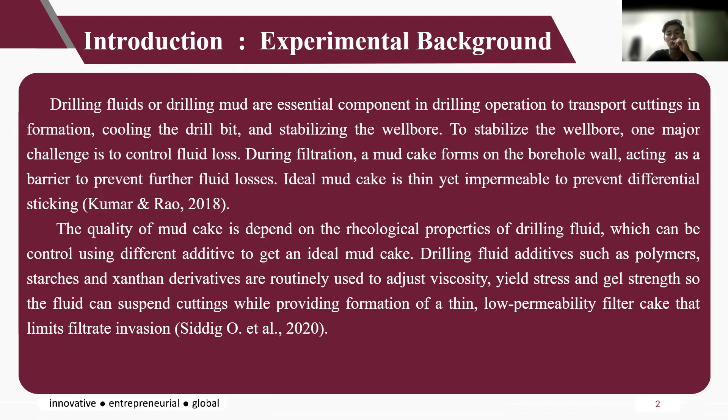Drilling fluid additives such as polymers, starches, and xanthan derivatives are routinely used to adjust viscosity, yield stress, and gel strength so that the fluid can suspend cuttings while providing formation of a thin, low permeability filter cake that limits filtrate invasion.

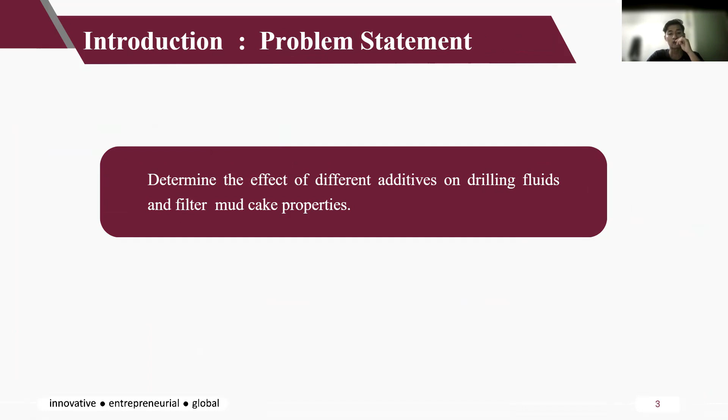Also, the problem statement of our experiment is to determine the effect of different additives on drilling fluids and filter mud cake properties. I will pass the next slide to my friend Isdiat.

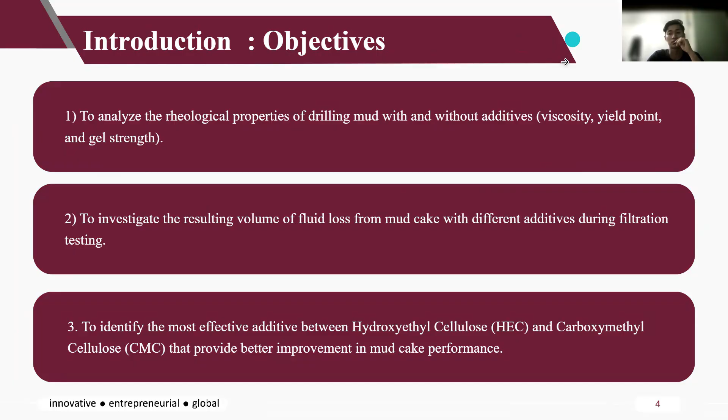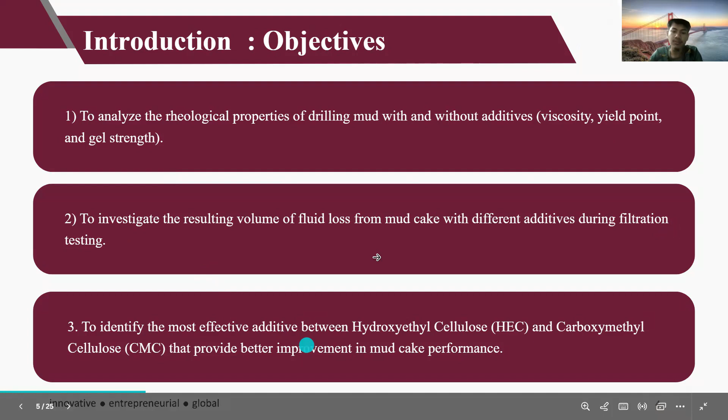Next, I will continue with the objectives. First, we want to analyze the rheological properties of drilling mud with and without additive, which is viscosity, yield point, and gel strength. Second is to investigate the resulting volume of fluid loss from mud cake with different additives during filtration testing. Lastly, to identify the most effective additive between hydroxyethyl cellulose and carboxymethyl cellulose that provides better improvement in mud cake performance.

Next, hypothesis. For the first hypothesis, the drilling fluid with additive will have better rheology properties such as higher viscosity and gel strength than drilling fluids without additive.

Second, mud cake thickness from drilling fluid with additive is thinner than without additive. Third, mud cake from drilling fluid with additive will have lesser volume filtrate than drilling fluid without additive. Lastly, CMC mud cake will have better mud cake performance than HEC, hydroxyethyl cellulose.

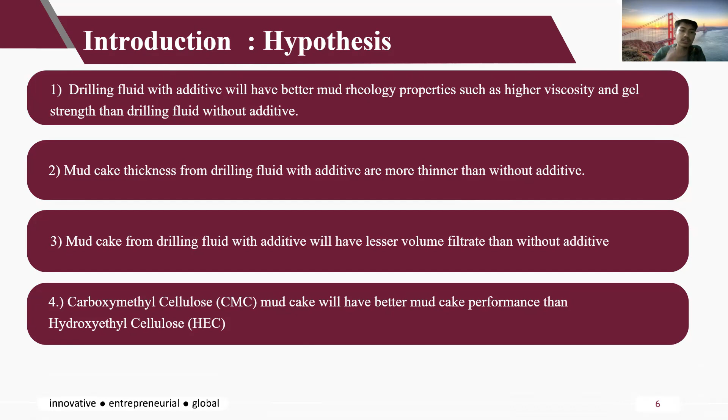The scope of study is limited to water-based drilling fluid prepared under laboratory conditions. This experiment focuses on three drilling fluid samples: a base fluid of bentonite and water to establish a baseline, second a polymer modified fluid with CMC, and third a polymer modified fluid with HEC. Additive concentration will remain constant for CMC and HEC samples. Results will be analyzed and compared to determine which additive provides the best drilling fluid and mud cake performance.

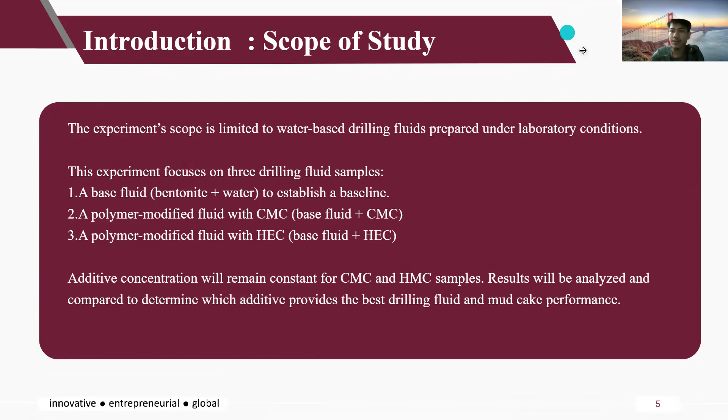This drilling fluid, or mud, is a critically engineered system essential for the success and safety of rotary drilling operations. Its primary functions include transporting drilling cuttings to the surface, controlling formation pressure, cooling and lubricating the drill bit and string, and last but not least, stabilizing the wellbore.

So to achieve the necessary properties for the function, a variety of chemical additives are incorporated into the base fluid. These additives are designed to precisely control the fluid's density, rheology, which is the flow properties, and lastly the filtration characteristics.

So in our experiment, we're going to use the additive that functions as a fluid loss control agent. For example, we use CMC and HEC. The function is that this additive reduces the volume of the liquid phase, which is the filtrate, that invades the permeable formation.

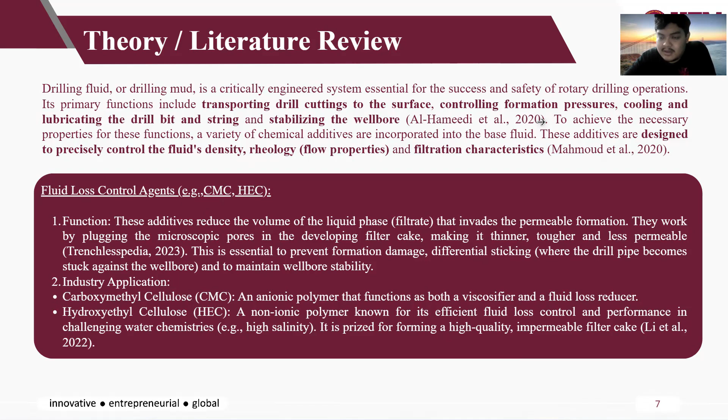Next we go to the theory about rheological properties. The rheological properties of a drilling fluid describe its flow behavior and are critical for hole cleaning, suspension of cuttings, and also for hydraulic calculation.

Drilling fluids are non-Newtonian, so their viscosity can change with the applied shear rate. These properties are measured using a rheometer, or what we call a viscometer, which applies a shear rate and measures the resulting shear stress. Key rheology parameters are derived from the viscometer reading.

The first one is apparent viscosity. Apparent viscosity is the viscosity of the fluid measured at a single shear rate, representing the fluid's overall resistance to flow. The formula for apparent viscosity is the reading from the 600 RPM divided by 2, and the unit is centipoise. The next is plastic viscosity.

Plastic viscosity is the resistance to flow due to the mechanical friction between solid particles in the fluid and the fluid itself. A high PV often indicates a high solid content. The formula for plastic viscosity is the reading from 600 RPM minus the reading from 300 RPM, and the unit is also in centipoise.

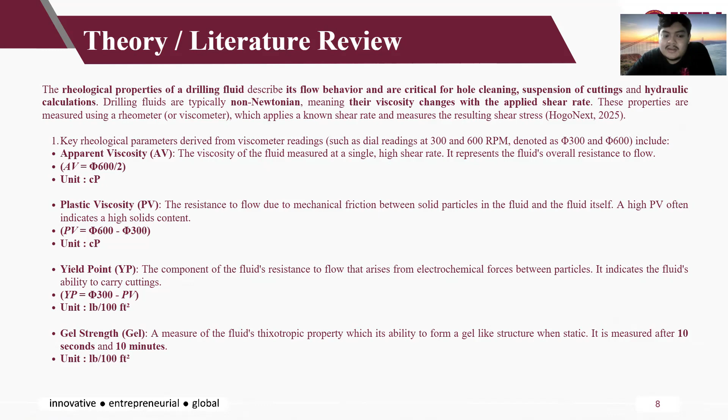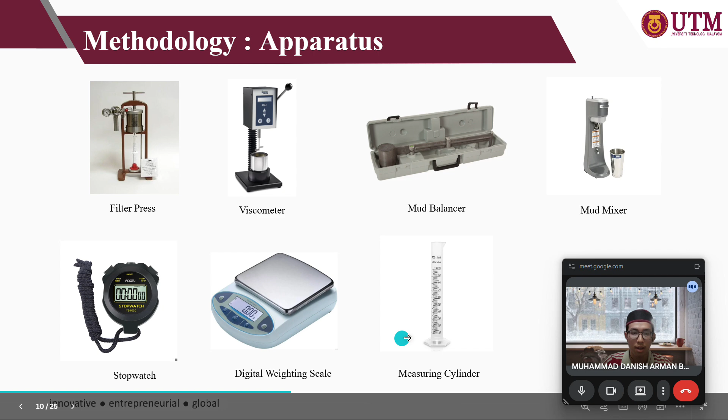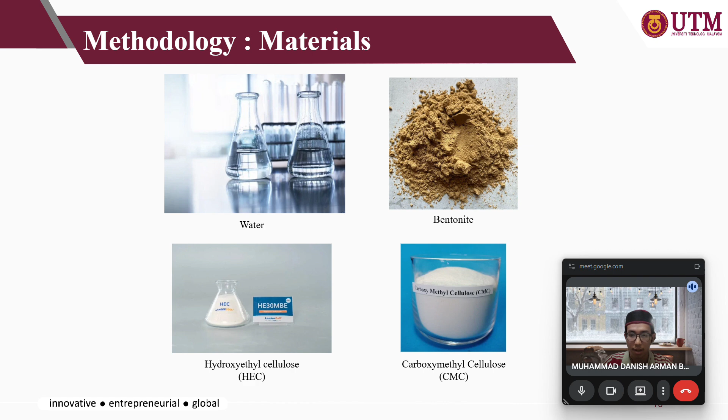I will present about methodology. Firstly is the apparatus of the experiment. For apparatus, we use filter press, viscometer, mud balance, mud mixer, stopwatch, digital weighing scale, and measuring cylinder. For our materials, we use water, bentonite, hydroxyethyl cellulose (HEC), and carboxymethyl cellulose (CMC).

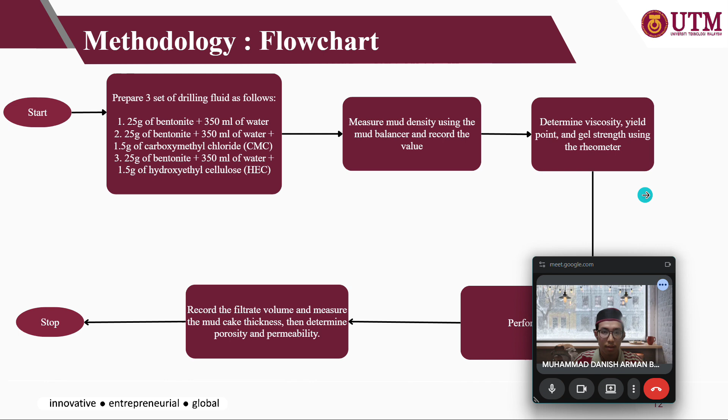This is our flowchart, as you can see here. And this is our procedure.

Firstly, we prepare 3 drilling fluid samples as follows. First sample is 25 gram bentonite plus 350 ml water. Second sample is 25 gram bentonite plus 350 ml water plus 1.5 gram CMC. Third sample is 25 gram bentonite, 350 ml water, and 1.5 gram HEC.

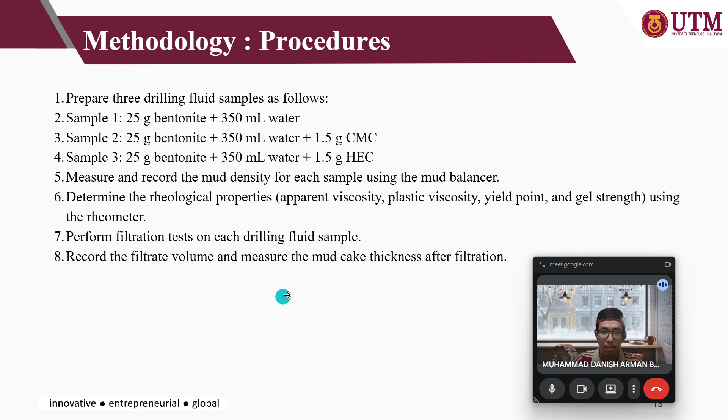After that, we measure and record the mud density for each sample using the mud balance. Then we determine the rheological properties, which are apparent viscosity, plastic viscosity, yield point, and gel strength, using the rheometer. Then we perform filtration tests on each drilling fluid sample. Lastly, we record the filtrate volume and measure the mud cake thickness after filtration.

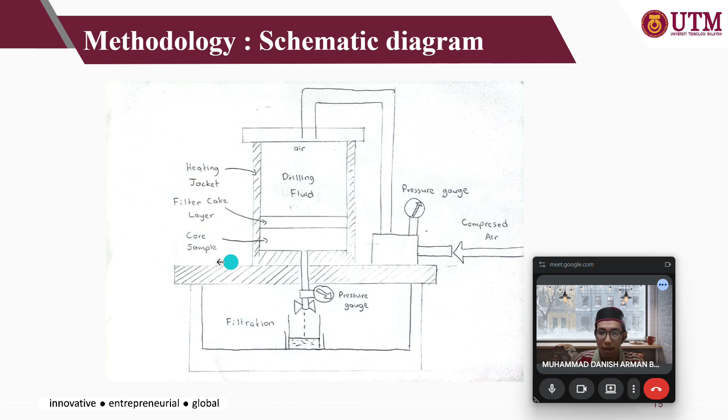As you can see here, this is the schematic diagram for our experiment. Firstly, compressed air enters the pipe into the drilling fluid, and the drilling fluid being compressed forms the filter cake layer and core sample, and filtration occurs.

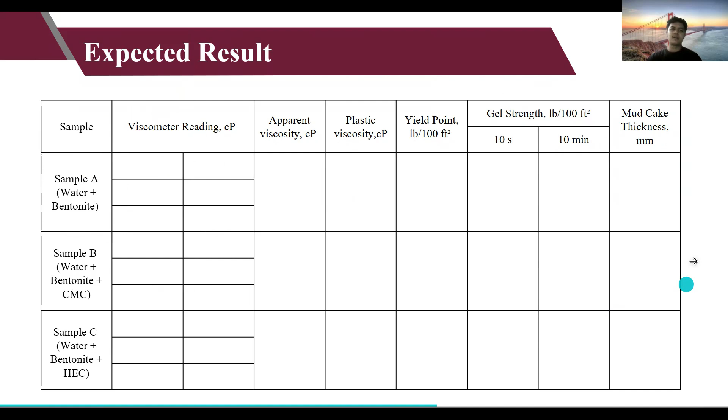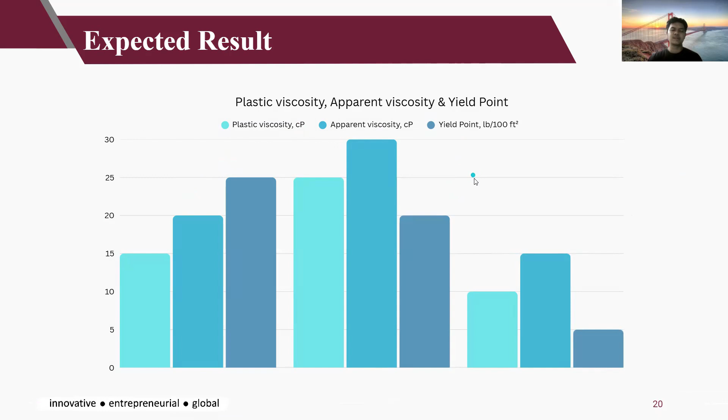As per the explanation, HEC is water soluble. It is more soluble than CMC because HEC is a non-ionic polymer, which makes it more water soluble. Hence, it is exploited as a thickening agent.

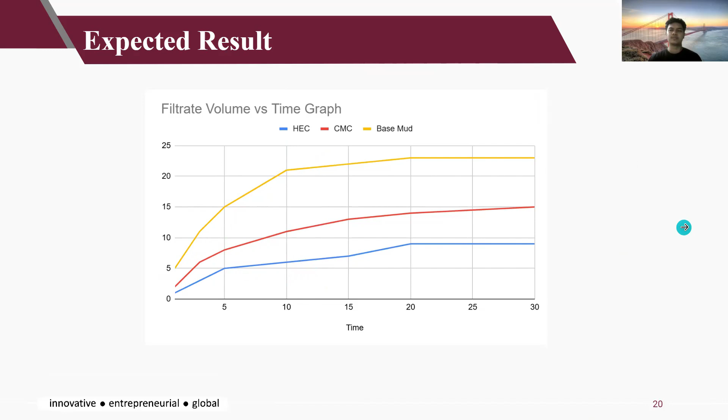Our expected conclusion: the results will likely confirm the hypothesis. As a fluid loss additive in bentonite-based drilling fluids, HEC is expected to perform better than CMC. This is due to, as I explained before, HEC acting as a better thickening agent because of its non-ionic characteristic.

As for CMC, it is a water-soluble based additive that is an ionic polymer, which makes it perform worse than HEC as a thickening agent.

Compared to both CMC and the base fluid, HEC fluid will provide the least amount of filtrate and create a thinner, more durable, and impermeable filter cake, which is attributed to HEC's superior sealing qualities responsible for this improved performance.

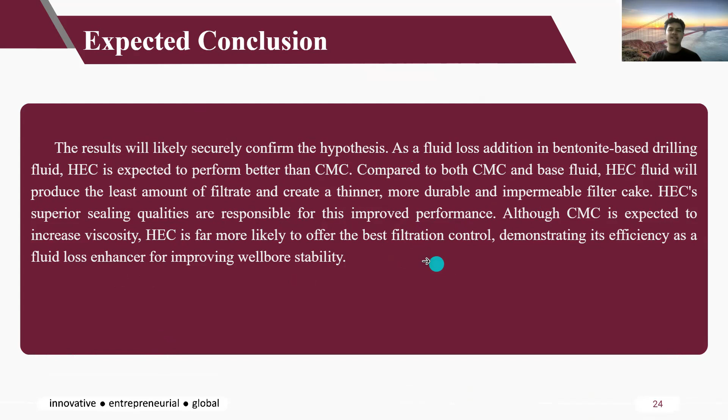Although CMC is expected to increase viscosity, HEC is far more likely to offer the best filtration control, thus demonstrating its efficiency as a fluid loss enhancer for improving wellbore stability.